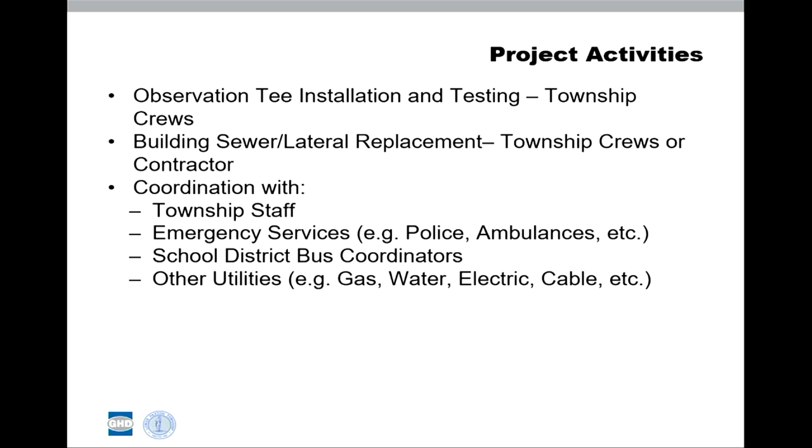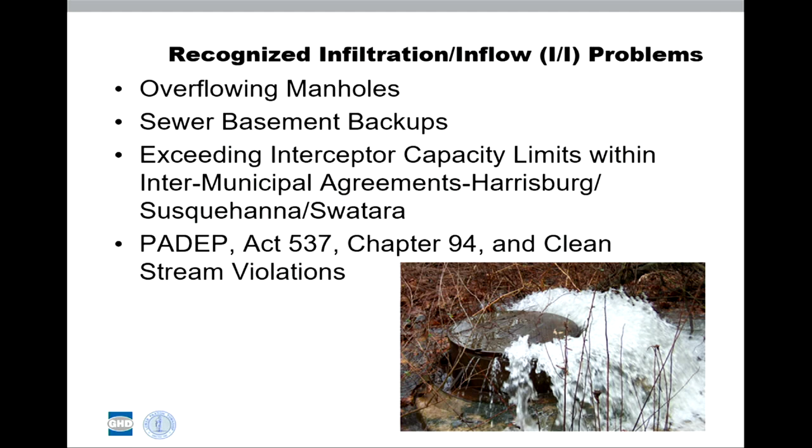Why we are here doing this presentation is that we recognized an I&I problem with overflowing manholes, sewer basement backups, and exceeding capacity limits at the Swatara and Harrisburg treatment plants. That started in 1993. After that, in '95, PADEP issued a Clean Streams violation, and we had to enter into a consent decree. We had several amendments to that, so now it is called the Second Amendment to the consent

decree. The requirements for this basin include replacement and rehab of asbestos cement and clay sanitary sewers that have reached their useful life. Most of the sewers in this area are 50 years old or more. We have to test and replace or repair PVC sewers that fail an air test and are contributing unacceptable amounts of flow, including private sewers. PVC sewers in BC7 and BC8 were metered in 2018, and all PVC areas showed excessive I&I.

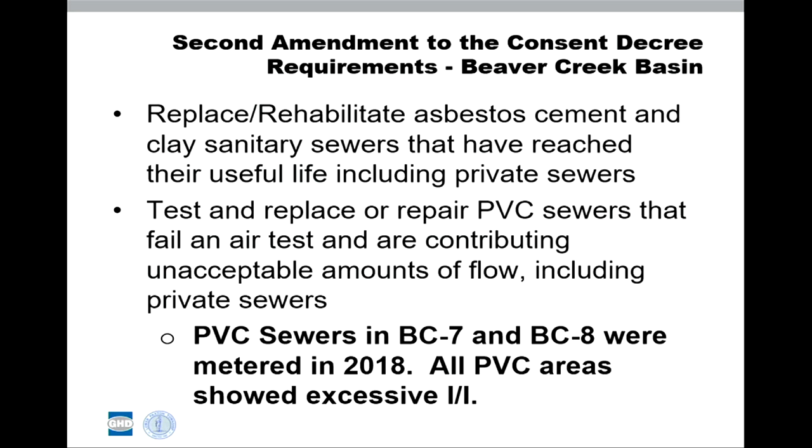And I failed to mention that is the only group of people that are invited to this public meeting. The project will have 3 public meetings, but the people that were scheduled to come to this public meeting were all PVC customers.

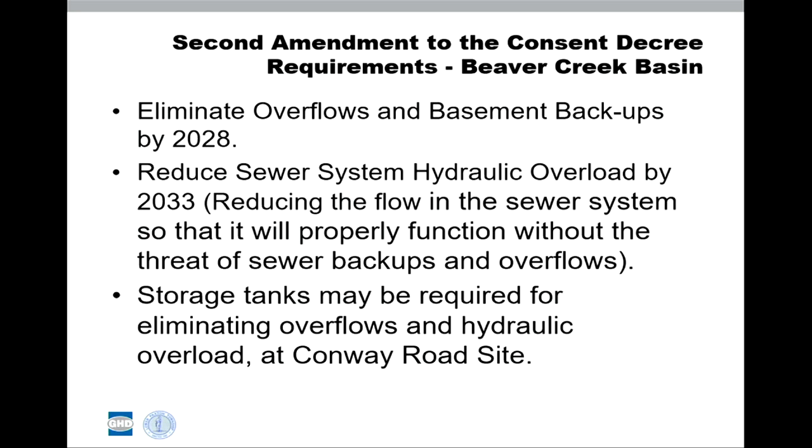In addition, for the Second Amendment, we have to eliminate overflows and basement backups by 2028, and reduce sewer system hydraulic overload by 2033, which means reducing the flow in the system so that it will properly function without any backups or overflows. We may have to build storage tanks for eliminating overflows and hydraulic overload. We did purchase a piece of property on Conway Road that is between Kendall Oaks and the township landfill.

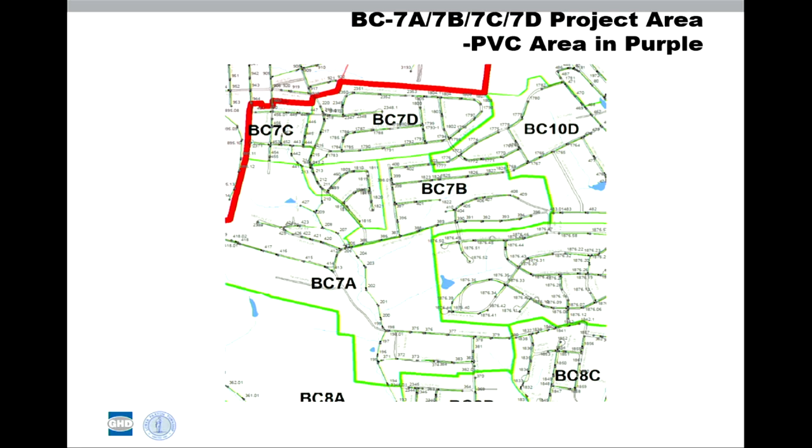So a little bit about the project area. This is a sewer index map that basically shows the streets and the sewers in the street, also the sewers that exit the street. This project again is for BC7, which includes mini basins A, B, C, and D. The project also includes areas of BC8B and 8C.

So PVC areas were temporarily metered at manholes denoted by the blue circles. Essentially, what we try to do is eliminate areas from construction if possible. Our GHD engineer and metering staff, along with our own township staff, have gone out to all PVC areas, and some areas are eliminated if they have low flow. Unfortunately, this area for your neighborhood has exhibited high flows, which is, again, why we're here tonight. As part of the Second Amendment, we have to reduce the flows.

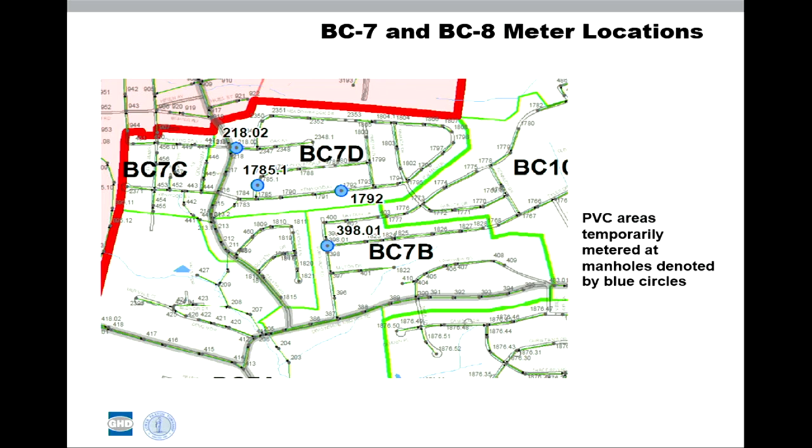And this is a little bit of the data that was found as part of those metering locations. The goal is to have 1,000 gallons per EDU. Sewers design peak I&I flows. That's groundwater infiltration into a sewer that is expected over the life of the sewer. We have to be at 1,000. You can see that the peak flows exceed that amount: 3,700, 3,500, 5,000, and 9,000.

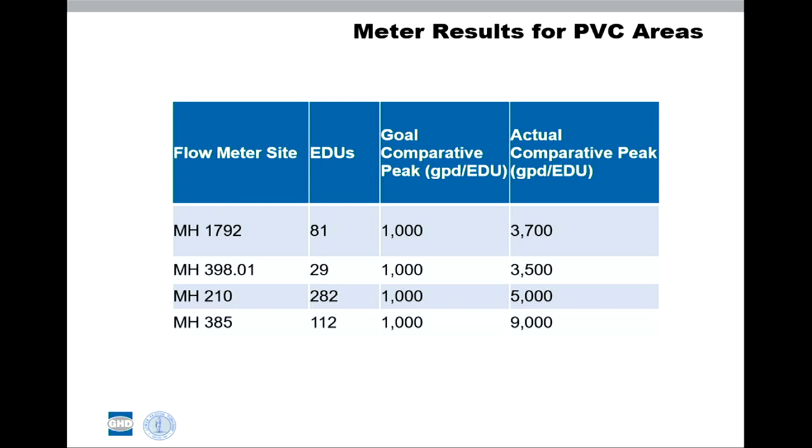So a little bit about the process and what you can expect. The first step is we conduct this neighborhood meeting. Then we receive the private sewer air testing, repair, and replacement agreements. We perform house inspections. We install the observation tees if not present. TV the laterals and building sewers to locate tees, pipe type, buried cleanouts. Then we test the laterals and building sewers.

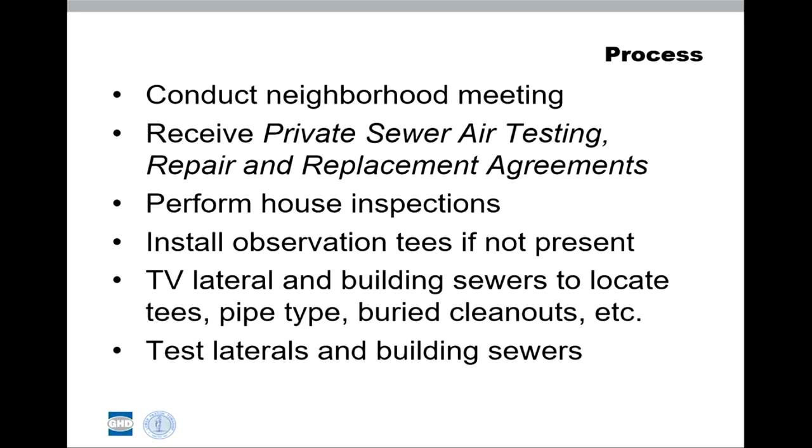Then we do the repair and replace and rehab of the laterals and building sewers that failed the air test. Township crews will also be testing sewer mains and manholes and will make any repairs or rehabs needed. Some digging within streets may be required. Some mains or manholes may be lined.

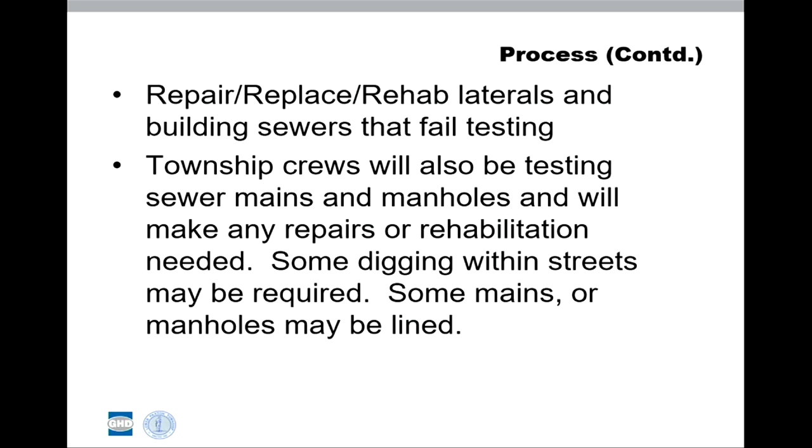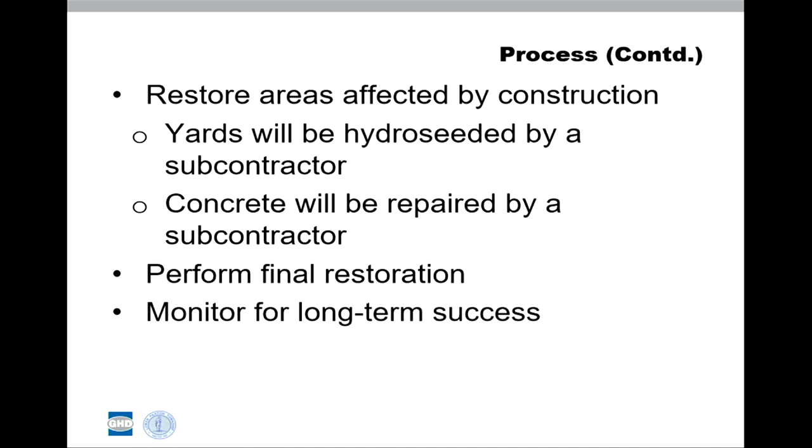The end of the process, we restore areas affected by construction. Yards will be hydroseeded by a subcontractor. Concrete will be repaired by a subcontractor. We perform the final restoration, and then we monitor for long-term success.

So a little bit about the scheduled milestones. The first thing we want to do through March and May is receive the agreements from the residents. We will then conduct building inspections. We'll go over that a little later. The building inspections are required to locate the sewer. Then we do the testing and repair replacement of the private sewers that we have scheduled to take about a year based on the size of the project. And then final completion is scheduled for September 2021.

So a little bit about what to expect and a little bit about the understanding of what a typical sewer layout is. You can see at the bottom of the slide, homeowners' responsibility. Every township is different. It's about 50% around the state where the township does not own any of the private sewer. In some townships, they do own the service lateral. In Lower Paxton, the ordinance that was passed with the original sewer installation provided that the building sewer and the service lateral be owned by the property owner.

The theory about this is that township crews do not have the proper equipment to maintain these private sewers. We do have equipment to maintain the mainline sewers. So that's sort of why we're here tonight. We have a homeowner's responsibility and authority's responsibility. Fortunately, we'll go through as part of this presentation that the township, because it's under a consent decree, is able to provide a sewer replacement at no cost to the property owner for their responsibility.

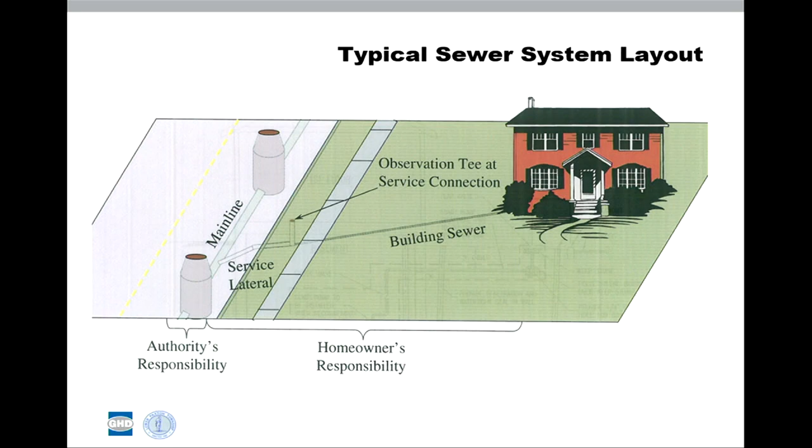A little bit more about the process. We need to come in as part of the house inspection and look for illegal sump pumps. This is a diagram to show what a legal sump pump should look like. You can see where the stone area is to the right of the slide, where it provides a weep hole for drain back. So essentially the sump pump that's in your basement should be pumping out into a pervious area with a weep zone to allow the water to filtrate back into the ground.

We have in the past had plumbers hook in sump pumps directly into the sewer system, which can cause an excessive I&I issue in that neighborhood. Most of the sump pumps have been removed over the last 20 to 30 years, but that will be part of the inspection to make sure they weren't rehooked up.

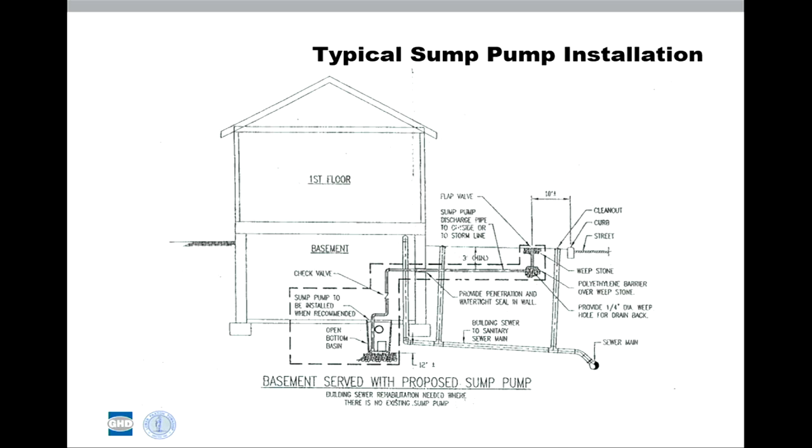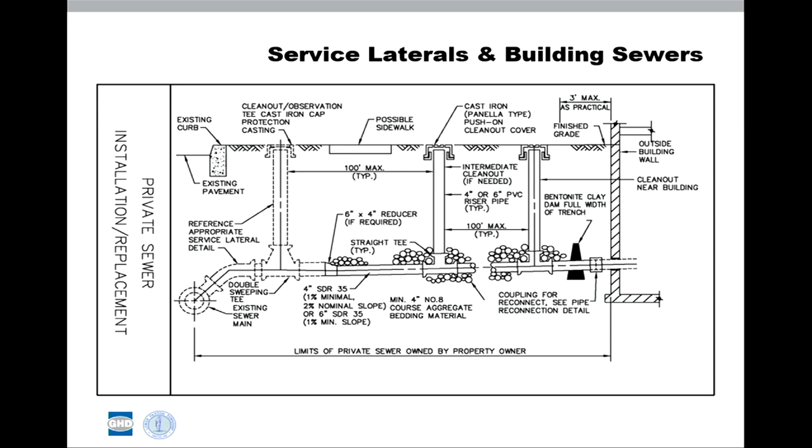Okay, what kind of disruption can be expected during the construction on your property? A little bit of details about that. So this is a service lateral and building sewer diagram that you received as part of your agreement. This is a typical building sewer replacement detail, and the building sewer spec that we have for contractors and that we have to follow is provided to all residents to have a better understanding of what the sewer is going to look like when it's replaced.

A little bit about the air testing. Because PVC sewers are today's standard, PVC sewers are not automatically replaced. We like to salvage that part of the sewer system if possible and save costs and disruption to the homeowners.

So the first thing we're going to do is install the observation tee, which is note 1. From the observation tee, we will then install a plug and we'll air test from the observation tee to the main, and then we will air test from that note 1 observation tee to the house. If they all pass, then we'll move forward to the next property. If either section fails the air test, it has to be replaced. It has to pass an air test standard of 5 pounds for 5 minutes with no drop in air.

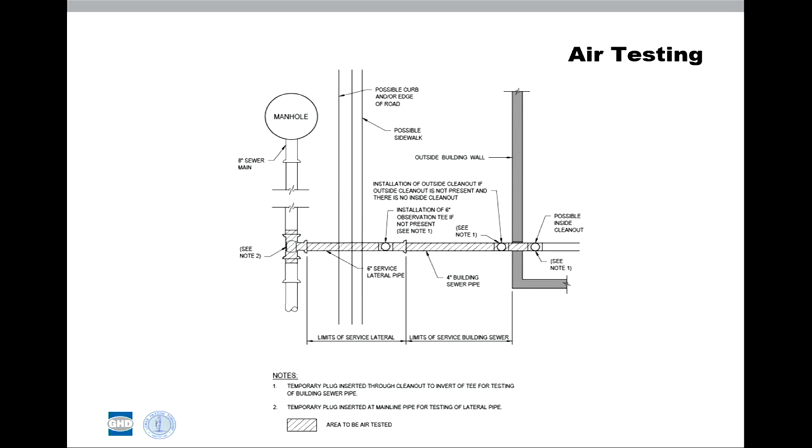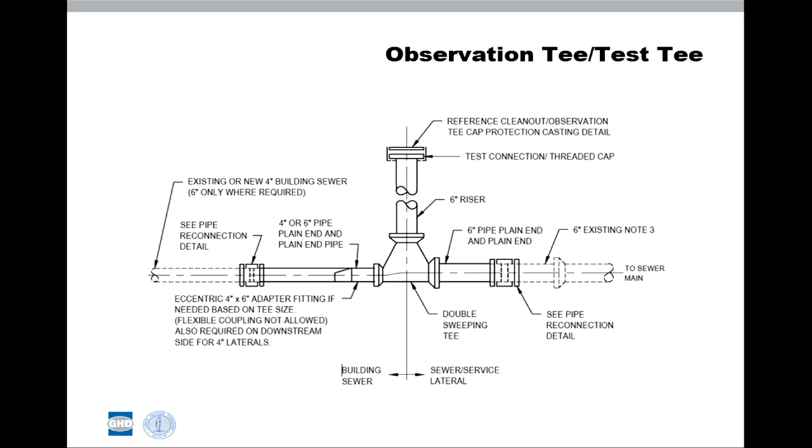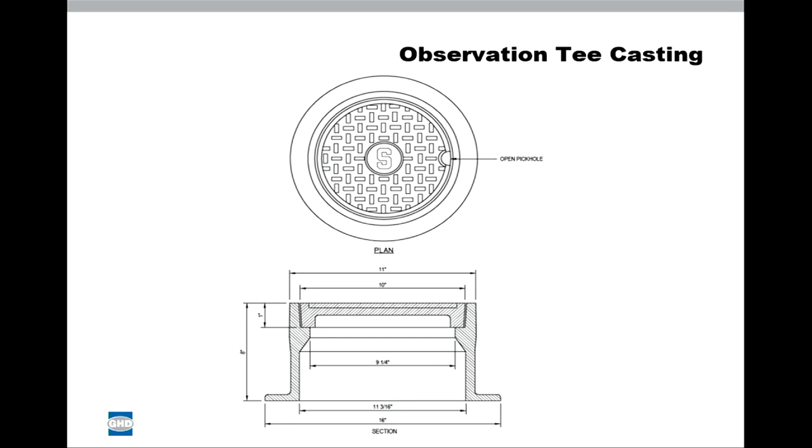The observation tee casting: typically what was done in the past is you had just a plastic riser that typically got broken. They get holes in it, they're hit by lawnmowers, that sort of thing. So we went with an actual steel casting cover, and this is just a diagram. It basically just sits on top of the plastic cap and is put at grade level.

And now I'll turn it over to Tim. Yeah, and on the video, you have to play.

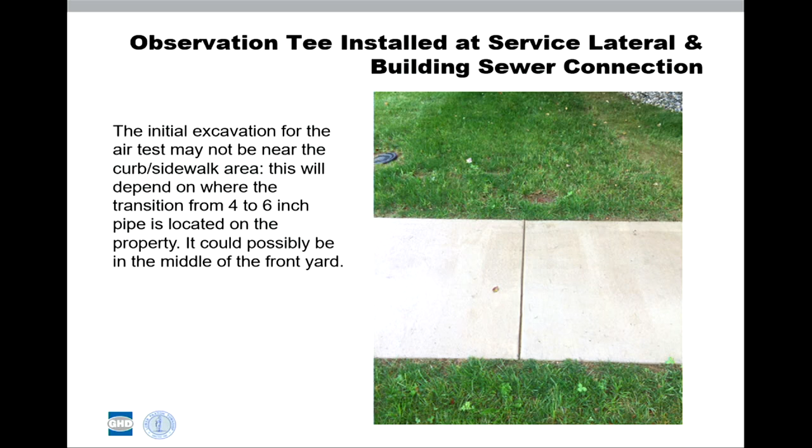Okay, so I'm going to talk a little bit about the process of what you'll actually see on your property between the street and the house. You can see here the initial excavation. There's generally going to be a pipe, a private sewer that runs. If you have a sidewalk, it's going to go underneath the sidewalk, and you can see the restoration work that's typically performed in this area.

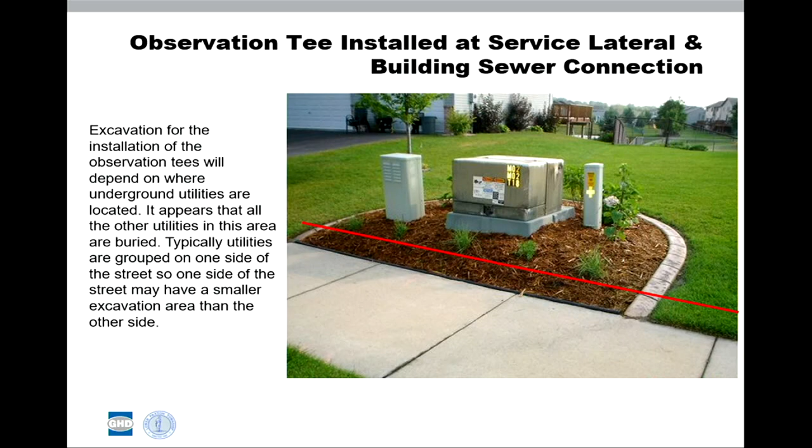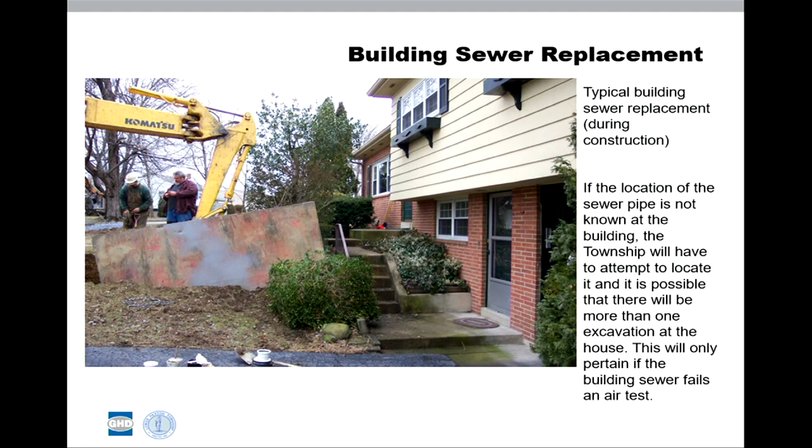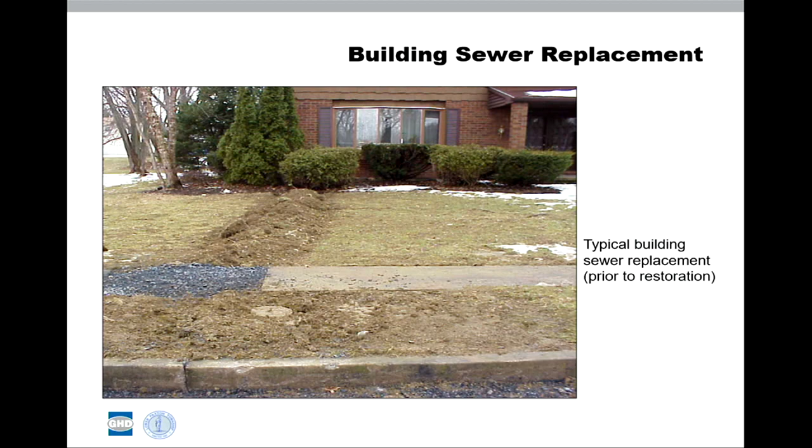And this is just again showing the restoration that needs to take place. You can see the trench that goes underneath the concrete sidewalk and to the house, and the clean out casting here between the curb and the sidewalk. So then, to go through the yard restoration portion, this is that same property after all the restoration work is completed.

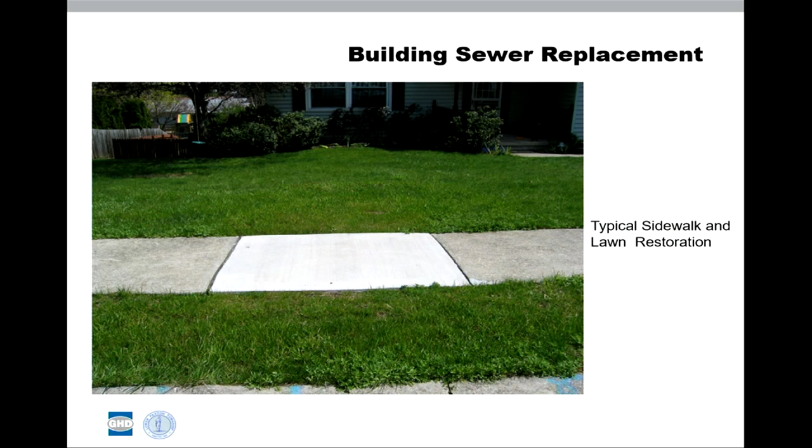What it goes through is basically what our process is, and I'll go through that in more detail here, and it also provides you with some additional details on how to care for your new lawn once we're gone. So again, our lawn restoration contractor will take care of removing any of the large particles, roots, stones, anything that's going to prevent the grass from growing.

Once they have that completed, they're going to install a layer of screened topsoil, and they're going to use a hydroseeding approach. Basically that is a slurry mix of seed, fertilizer, lime in some cases, and mulch, and that's sprayed on top of the topsoil.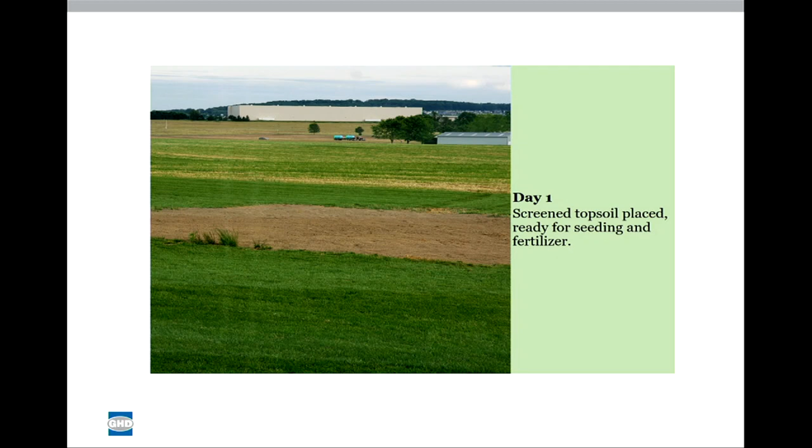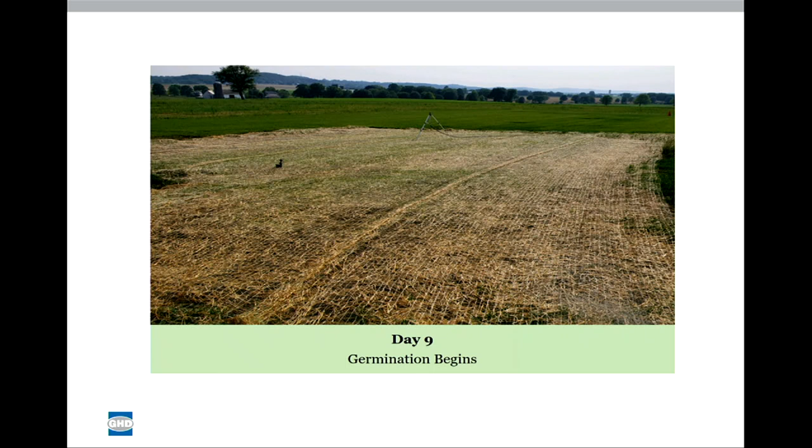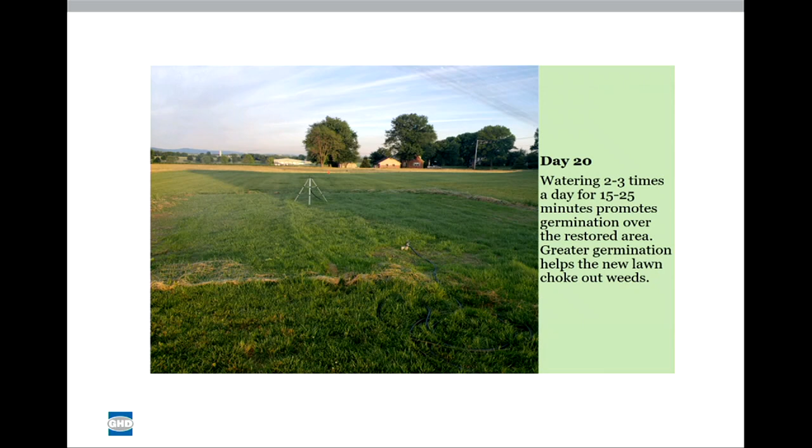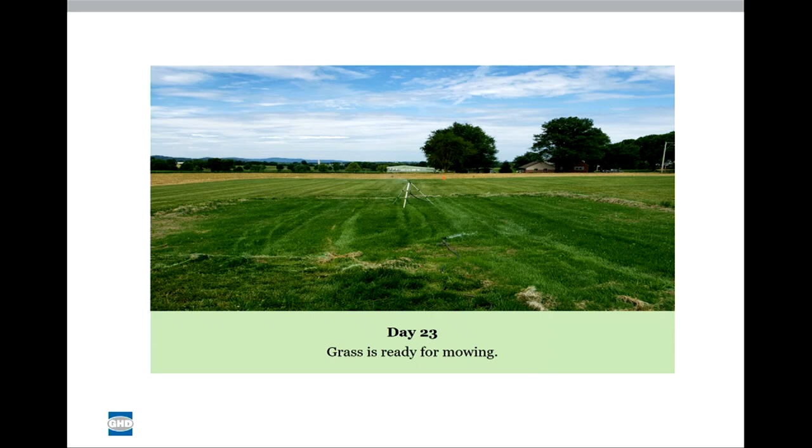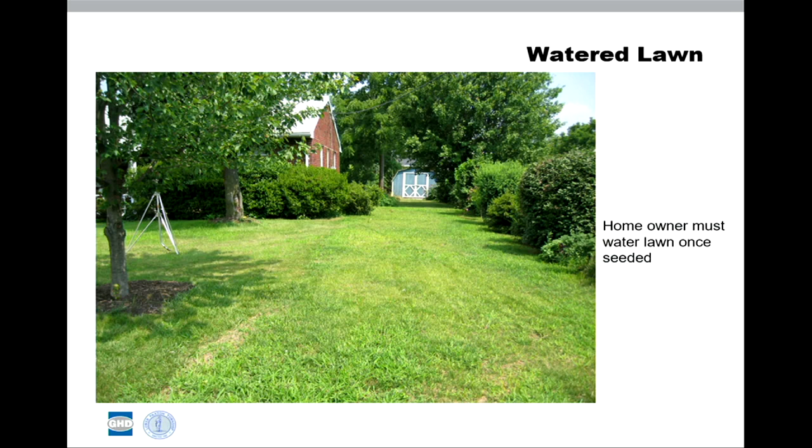So again, watering is the most critical component of this whole process. And here we have an example of a lawn that was watered, and then the next slide, a lawn where the property owner neglected watering. So with that, I'll turn it back over to Bill.

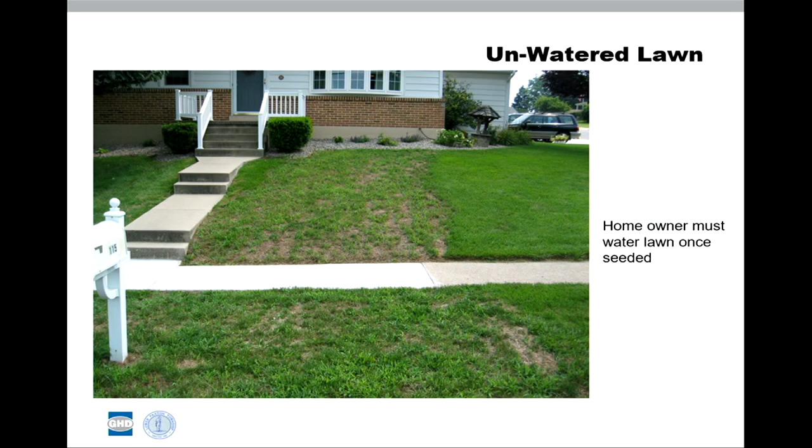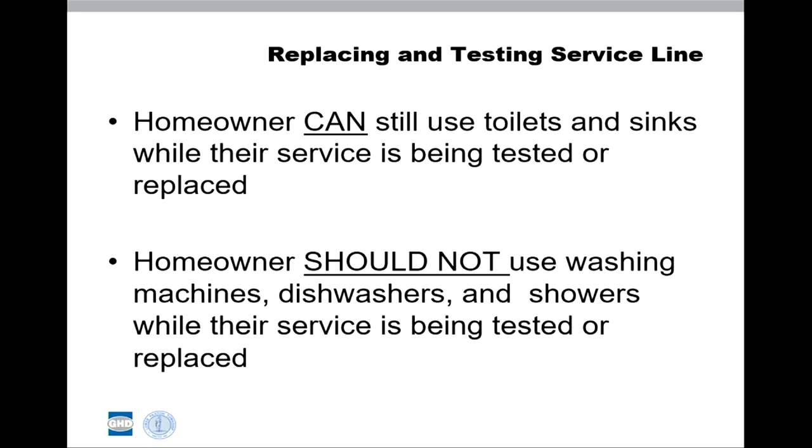Okay, we just have a few more slides to give you an update on what other things you can expect on construction on your property. Replacing and testing service lines process: homeowners can still use the toilets and sinks while their service is being tested or replaced. Homeowners should not use washing machines, dishwashers, and showers while their service is being tested or replaced.

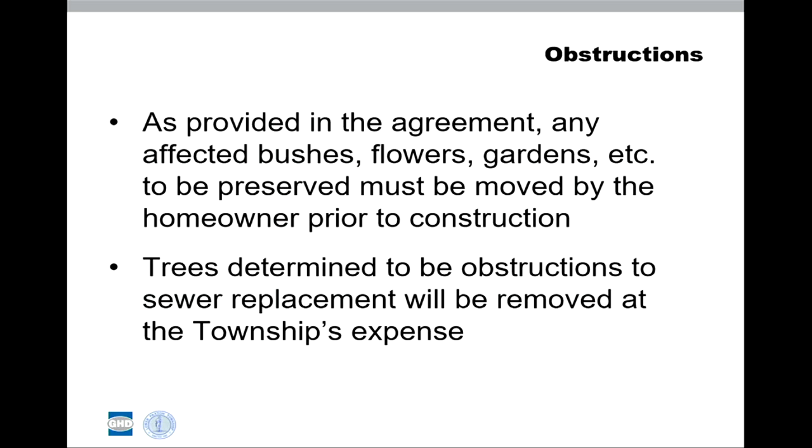Also, for obstructions, what to expect. As provided in the agreement, any affected bushes, flowers, gardens, etc. to be preserved must be moved by the homeowner prior to construction. Trees determined to be obstructions to sewer replacement will be removed at the township's expense. As part of the house inspection that John Dobler will be doing, he will provide more information when he determines where the sewer is at your property of what tree would have to be removed, and that's a separate contract. And it can also help you make determinations on if you have flowers or gardens in the way that you want to move out of the way.

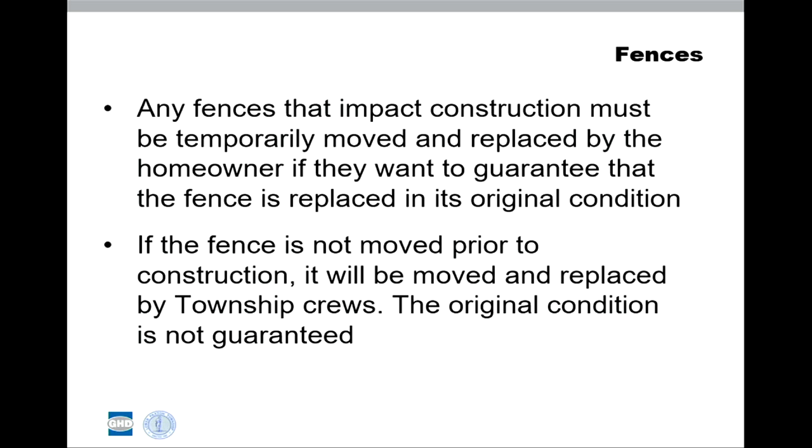Fences, if the sewers go around the back, normally fences are not in the front yard. Any fences that impact construction must be temporarily moved and replaced by the homeowner if they want to guarantee that the fence is replaced in its original condition. If the fence is not moved prior to construction, it will be moved and replaced by township crews. The original condition is not guaranteed, but they normally do a pretty good job with that.

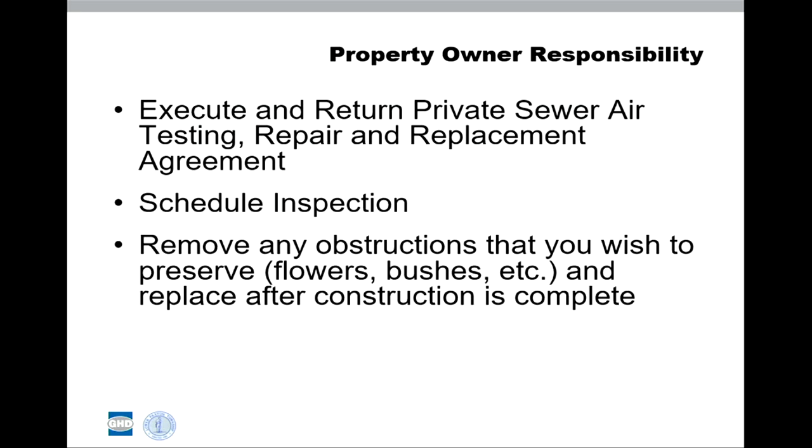Private property owner responsibilities. So we ask that you execute and return the private sewer air testing, repair, and replacement agreement, schedule an inspection, remove any obstructions that you wish to preserve, and replace after it is complete. Also, notify Lower Paxton Township staff of any underground utilities installed by the property owner, including gas, water, electric for swimming pools, dog fences, water lines for sprinkler systems, and electric for landscape lighting. Water grass after planting is complete.

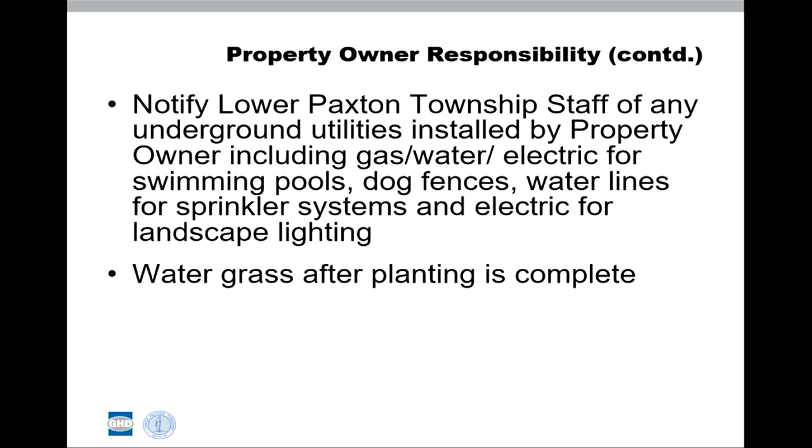A little bit about the total project. So the total sewer repair replacement plan includes replacement or rehab of 65% of the total sewer system in Lower Paxton, which includes Paxton Creek, Beaver Creek, Spring Creek, and Asylum Run. Also, as part of the consent decree, we may have to build storage tanks in both Paxton and Beaver Creek.

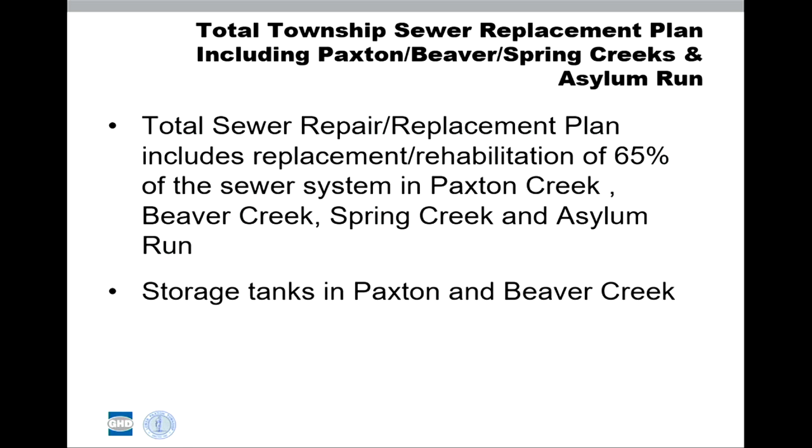The cost estimate for this project is $14,200,000: $13,400,000 for construction, and $800,000 for the township I&I crew, which is the 178 properties that we're talking about today.

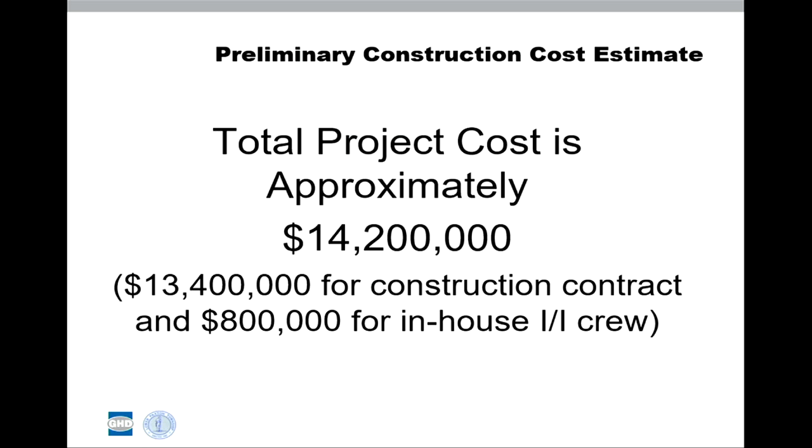So the benefits: we have a 50-year-old public sewer system that's going to be replaced and rehabbed, including private sewers. The community asset is maintained and preserved, and the environment is protected by the elimination of overflows and basement backups.

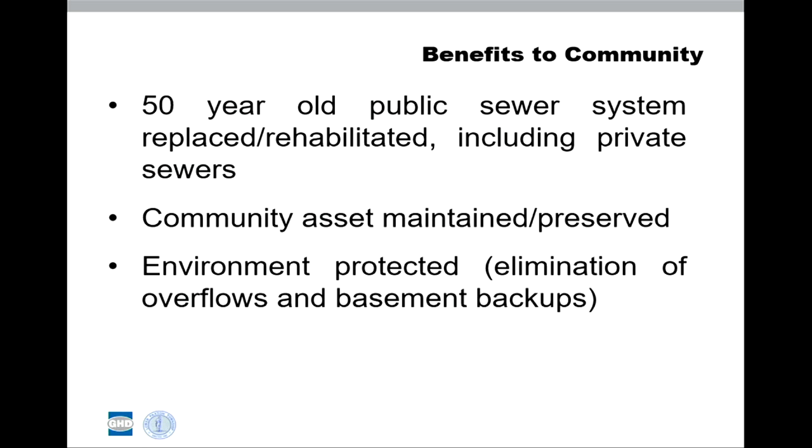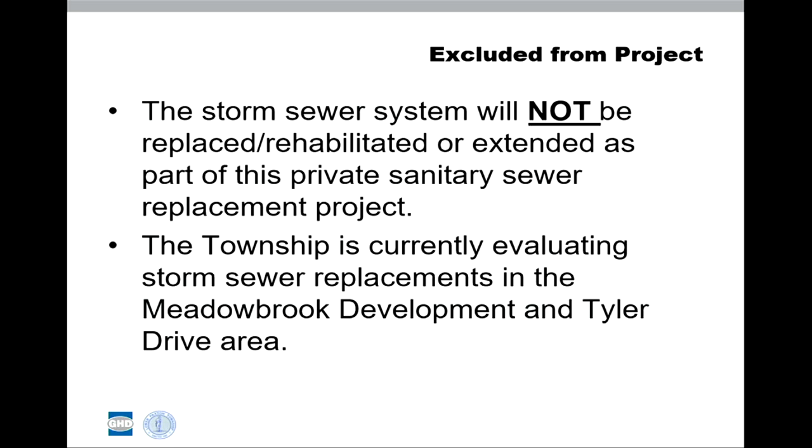Not part of this project: the storm sewer system generally will not be replaced or extended as part of this private sanitary sewer replacement project. However, the township is currently evaluating storm sewer replacements in the Meadowbrook development and adjacent Tyler Drive area.

Civic Ready: as part of our new webpage software, we have a Civic Ready program. The township will be utilizing the Civic Ready program for public notifications. If interested, homeowners must provide a cell phone number or email address as part of the private sewer replacement agreement. At the bottom, there is an area for you to put in your cell phone and your email address.

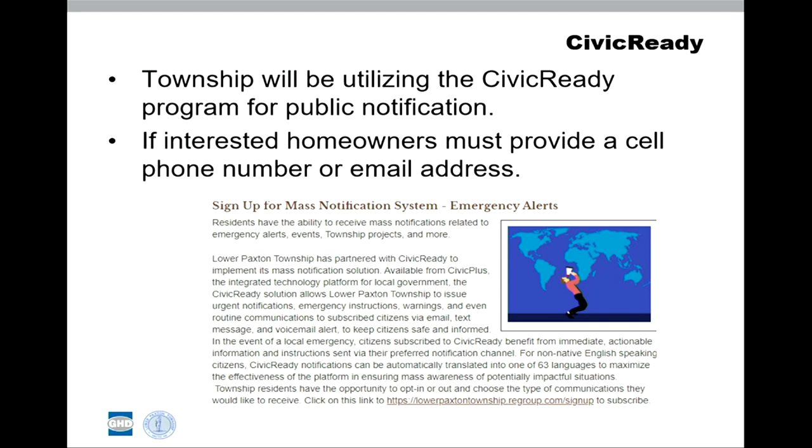So that concludes our presentation. I wanted to just go over a little bit about the letter that you should have received for the private sewer replacement project. The neighborhood meeting was scheduled for March 24th and had to be canceled due to the coronavirus outbreak. Specifically, the meeting has been canceled due to the closure of the Devonshire Church as a result of the CDC recommendations that all large gatherings be discontinued.

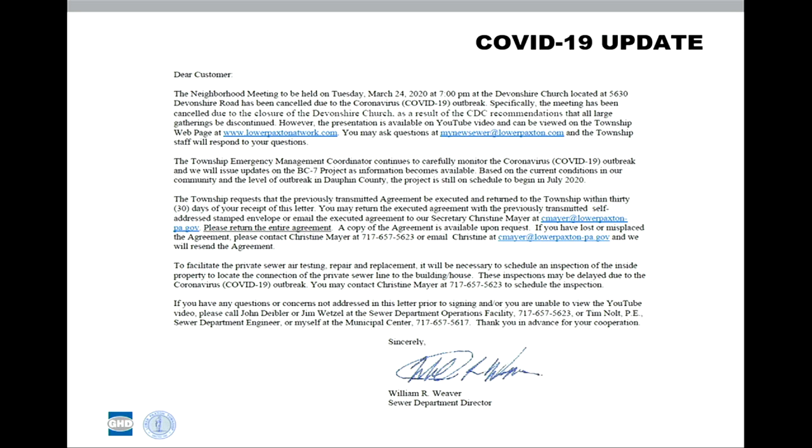This is why we have this YouTube presentation for the residents to see and hear what to expect as part of the project. If you have questions about anything that was presented today by Tim and I, you can just email us at mynewsewer@lowerpaxton.com, and Tim and I and other staff and engineers will respond to your questions.

The Township Emergency Management Coordinator continues to carefully monitor the coronavirus outbreak, and we will issue updates on the BC-7 project as information becomes available. Based on the current conditions in our community and the level of outbreak in Dauphin County, the project is still on schedule to begin in July 2020.

So the township requests that the previously transmitted agreement be executed and returned to the township within 30 days of your receipt of this letter. You may return the executed agreement with the previously transmitted self-addressed stamped envelope, or email the executed agreement to our secretary, Christine Mayer, at cmayor@lowerpaxton-pa.gov. We ask that you please return the entire agreement. A copy of the agreement is available upon request.

If you have lost or misplaced the agreement, please contact Christine Mayer at 717-657-5623 or email Christine at cmayor@lowerpaxton-pa.gov, and we will resend the agreement.